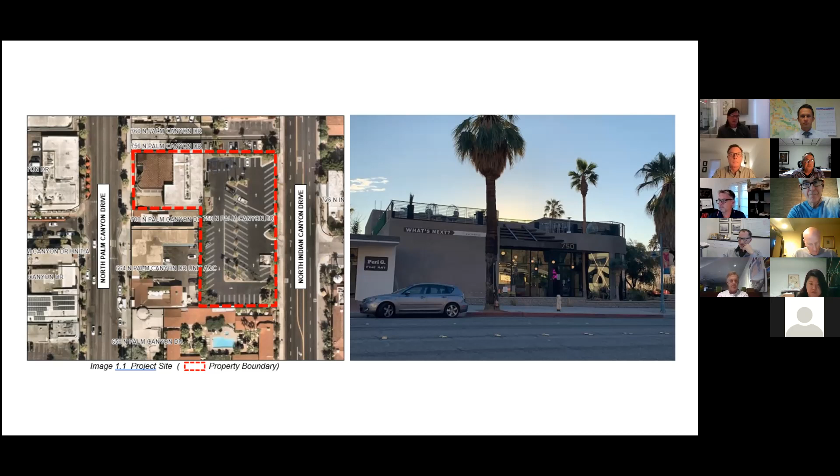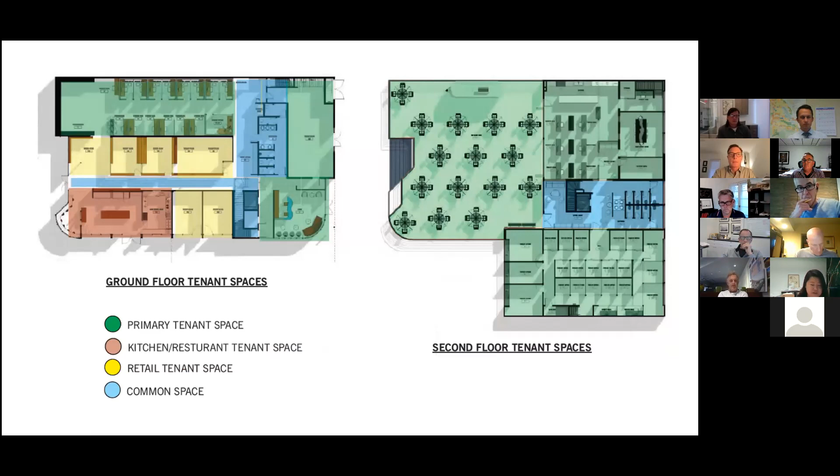Just to go over the project site one more time, the project site is a multi-tenant commercial building in the C1 zone, and it's a 2-story building, as you can see in this image. The building is going to be utilized by multiple uses that include co-working space, office spaces, cafe/restaurant and retail tenant spaces, and common spaces. This is the view of the building from the primary elevation, which is on North Palm Canyon.

As you may recall, previously the applicant proposed the installation of 13 signs. Since then, after receiving comments from the AAC, the applicant has revised the plan. One of the comments received was that the project is proposing too much signage, so the applicant has decided to reduce the amount of signage for the building.

So these are the signs that have been removed from the previous sign program. Before there were 13 signs, but now there are only 8 signs total proposed for this property.

The applicant has also revised the design of the freestanding signs. The proposed sign does not include the tenant names anymore. The height has been slightly reduced, as has the area. The construction of the sign itself has not really changed.

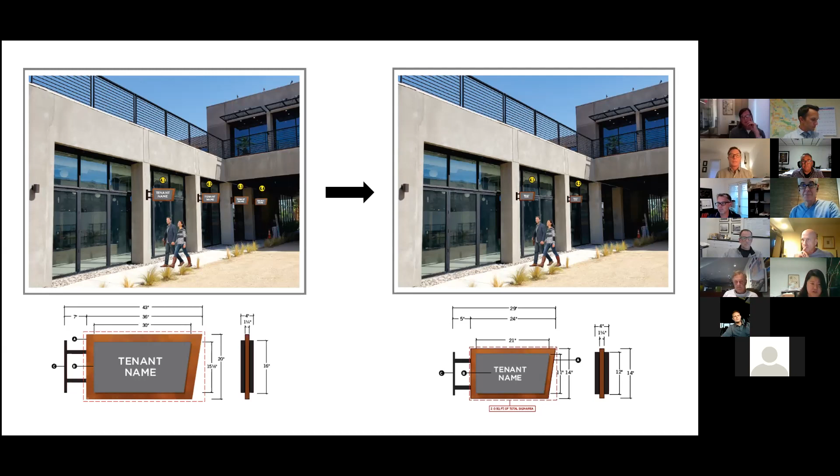The applicant is also proposing changes to the blade signs. As you can see here, the amount has been reduced by 50%. So instead of 4 signs, the applicant is now proposing 2 signs, and the size of the signs has also been reduced significantly. Previously, the projection was proposed at 43 inches; however, that's been changed to 29. This graphic shows how much of a reduction in size the applicant is proposing.

These signs were previously proposed on the North Palm Canyon side, the North Palm Canyon Drive frontage.

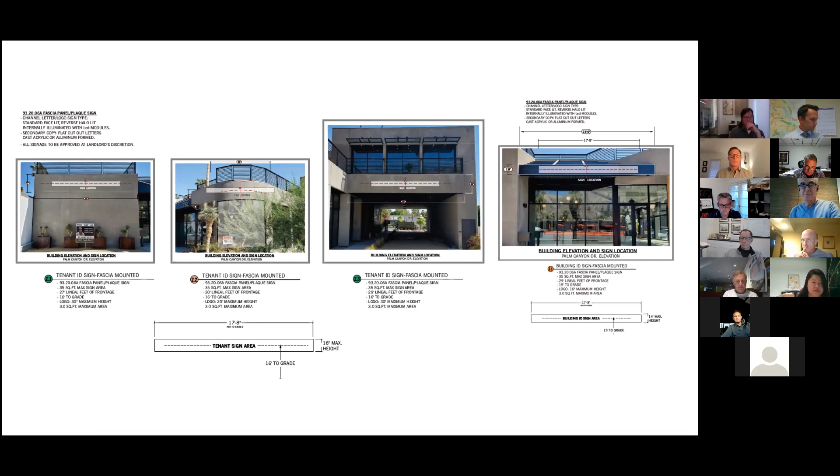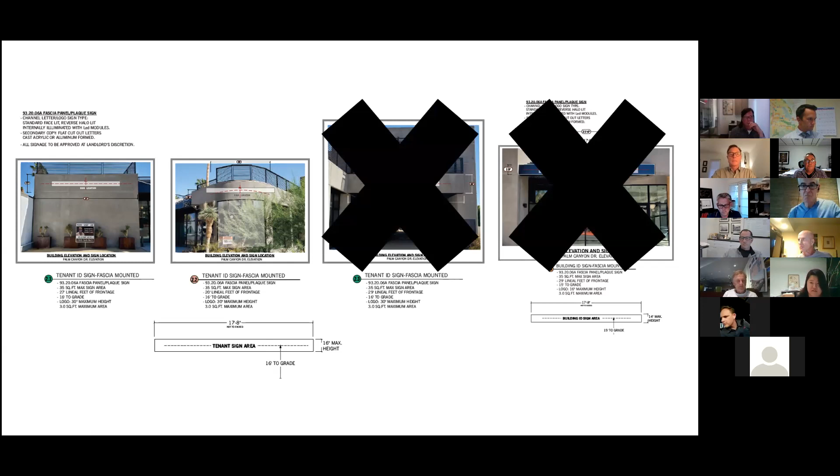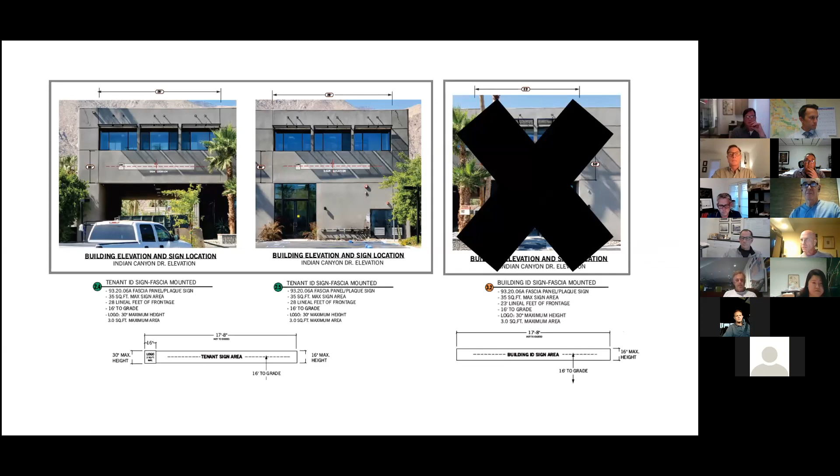Since the last meeting, the applicant has decided to remove the sign that was proposed above the driveway, as well as the fascia of the canopy structure. And for the rear elevation, the applicant has decided to remove the building ID signage. So these signs have been reduced or omitted from the revised sign program.

So the quantity of signage has been reduced, and the proposed signs now conform to the applicable zoning regulations. Freestanding signs will be fully located on the private property. Based on these findings, staff recommends AAC recommend approval to the Development Services Director as proposed. This is the end of staff presentation, and the applicant is available if you have any questions.

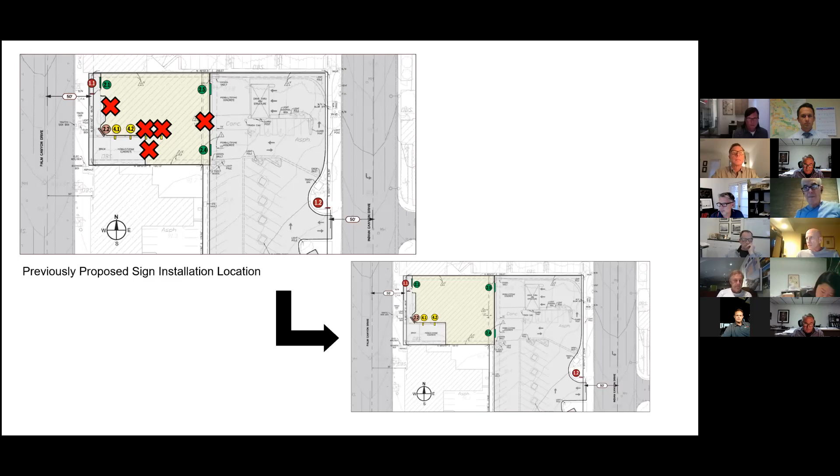John, I would like to confirm on the freestanding sign, which I think looks so much better than the previous one, that it's going to be made of aluminum painted to match Corten steel. I want to make sure it's painted to match, and not real Corten, so we don't have to deal with the rusting as it drips. Absolutely, yeah, it'll be a faux finish paint, and then it will be cleared, and there will be no issue with maintenance or actual rust.

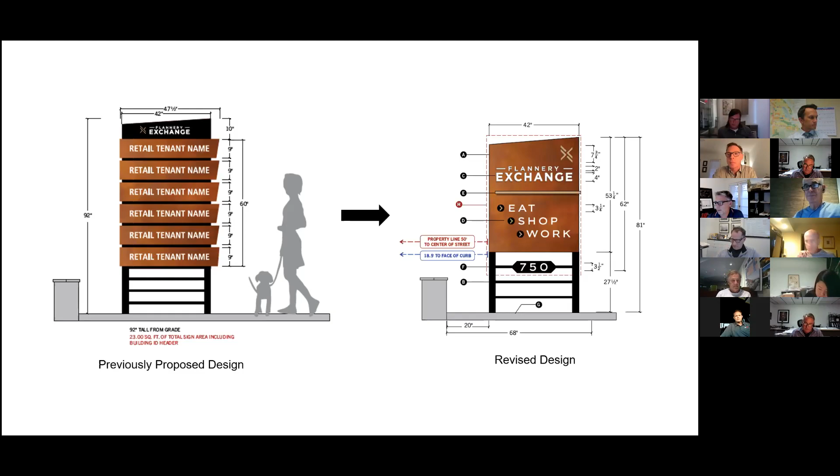Thank you. Do we have a second? Second by John Walsh. All in favor? Aye. Any opposed? Great, thank you. Thank you, Mr. Cross.

Okay, now we're going to move to a different sort of item for us, a discussion of the changes to the architectural review process. I'm going to turn the meeting over to Planning Director Flinn Fagg, who has been very involved with this and would be best to lead us through this discussion. At the end of this, we are not making a motion, but we're going to gather whatever comments the AAC has that Flinn can take back to whomever he needs to work with.

Mr. Chair, thank you very much, and thank you, members of the Architectural Advisory Committee. Appreciate you all moving your meeting to accommodate us tonight, and looking forward to hearing your thoughts and comments on proposed changes to the architectural review process.

What I'd like to do is a little bit different than what we typically do with the Architectural Advisory Committee. Let's see, can you all see my screen? Not yet. Okay, David, I might need your help. Just a moment.

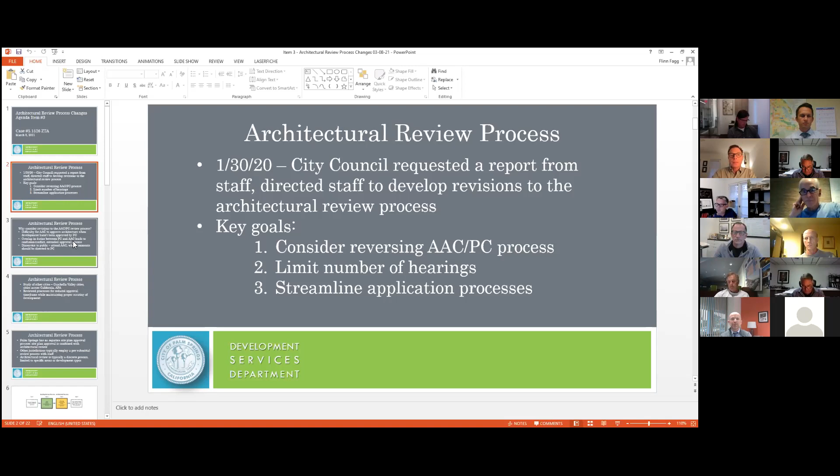With that in mind, the Planning Commission appointed a subcommittee to study the issue in July of 2020. On the subcommittee we had Kathy Wehrmuck, chair of the Planning Commission, Maria Song, a former member of AAC now on the Planning Commission, and Chair Jakeway representing the AAC. The subcommittee began a process of studying how we might do architectural review more effectively.

In terms of why we would want to do that, there are a couple of issues to address.

As you've all seen in past applications, especially where there are waivers requested or a conditional use permit dealing with operations, it's been difficult for the AAC to approve the architecture when there are still aspects of the site plan that haven't been approved by the Planning Commission yet. So you all are working with unclear boundaries in terms of what your responsibilities are.

Another issue is that there's an overlap between the duties of the Architectural Advisory Committee and the Planning Commission, so sometimes there are differences of opinion in terms of our criteria. That has been an issue sometimes in the past.

Third, and I think you've seen this in some applications, because AAC is first, it does a disservice to the public in that they come to the first meeting where they've learned of a project and want to give you all of their concerns and questions, and AAC really isn't the place for some of that.

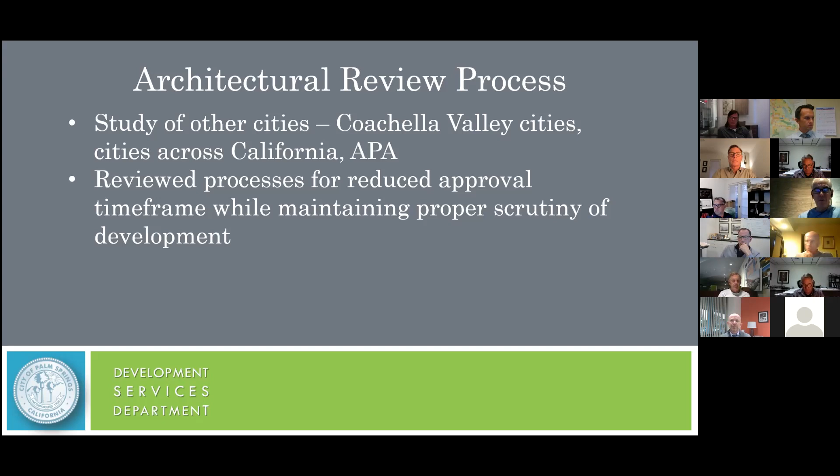Some of the things that we learned in doing that study is that Palm Springs has no separate site plan approval process, that we have a combined process, which is kind of unique that you don't see in other cities. Most other cities keep the site plan review process separate from the architectural review process. So we looked at that.

Also, many other cities employ some type of pre-submittal conference process with staff, whereby a staff member will sit down with an applicant before they have submitted formal applications, and review their project for conformance to criteria, both development standards such as height, setbacks, parking spaces, things like that, but also looking at any architectural criteria that that city might have.

Another thing that we learned from the study was that architectural review is typically a discrete process, and it's usually limited to specific areas of a city. Palm Springs, again, is kind of unique in that it applies to all commercial districts in our city, and also extends to residential districts in certain cases as well. So there's a number of ways that we're unique.

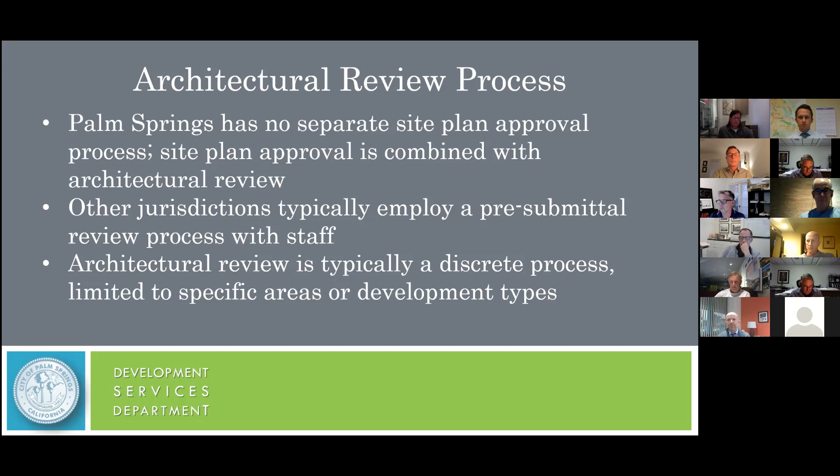We looked for best practices from other cities to look at what they were doing before getting into really looking at how we might make modifications to our existing code. So looking at our regulations as they currently exist for our architectural review process, it essentially goes as follows.

Step one is the formal submittal of the application. Staff takes in the application. We then route it to other departments for review, and prepare a staff report.

Step two is you, the Architectural Advisory Committee. So you all review the application, you make your comments, and you vote on the application.

Step three is Planning Commission. So they take into consideration the recommendation of the AAC, and then they either approve it, or in certain cases where city council approval is required, for example, for general plan amendments, change of zone applications, et cetera, then it is forwarded on to the city council.

So it looks pretty simple as you look at it in terms of a diagram. However, in practice, it actually is a little bit more complicated than that.

What typically happens is after the formal submittal, we take it to AAC, and for whatever reason, the applicant may need to redesign their project. And so it comes back to AAC again until you all are comfortable that it meets our criteria.

And then you'll forward it to the Planning Commission. Planning Commission will take a look at it, and sometimes they'll redesign it again, and it will go through that process. And so it's understandable that sometimes applicants are frustrated that once they've submitted their formal application, there are still a number of redesigns to the project.

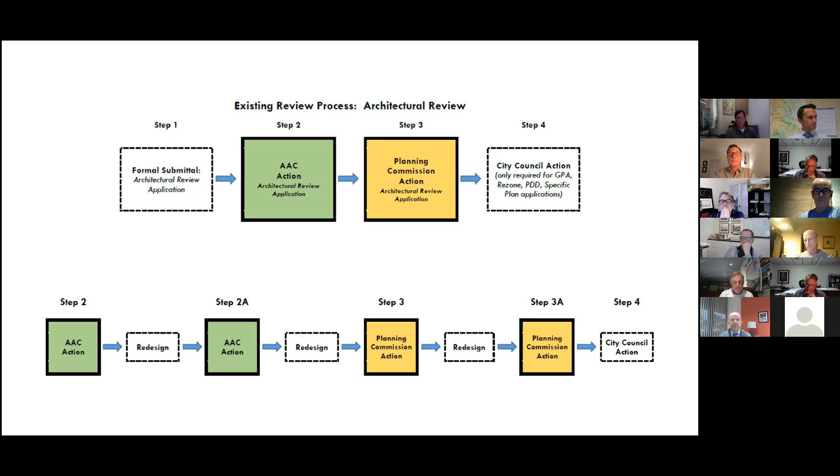So what we're proposing is that step one, prior to the formal submittal, would be a required pre-submittal conference with staff. The intent of that is to review the schematic design of the project for conformance to our architectural criteria, and look at conformance to development standards, again, parking requirements, setbacks, height limits, open space.

And then also to go over the required submittal materials. Part of the difficulty in you all making decisions on projects is because you don't have all of the drawings and the information that you need to make a decision. And so that's another reason for having a pre-submittal conference, is to sit down with applicants and go through what are all the required submittal materials that the AAC and Planning Commission would need to make a decision.

One of the other changes we are proposing is to split the process in two, with a separate architectural review application and a separate site development permit application. The architectural review application would go to the Architectural Advisory Committee, and the site development permit application would go to the Planning Commission. What we are attempting to do is give you all discrete responsibilities so there isn't overlap or conflict between the two groups.

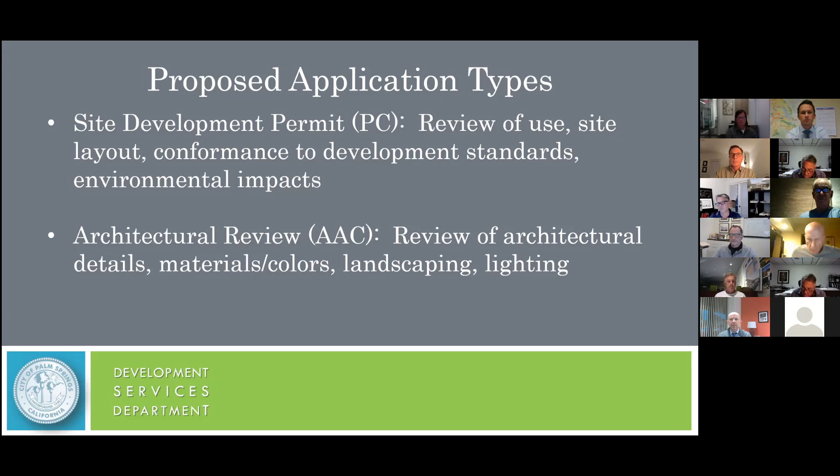Going into the proposed application types, the Planning Commission would review the site development permit. They would look at the use, the layout of the site, conformance to development standards. They would do the CEQA review or environmental impact review, and then approve the site development permit. Then the Architectural Advisory Committee would look at the architectural details, the colors and materials, the landscaping materials, placement of landscaping materials, lighting, hardscape—all of the functions of architecture.

To help you understand the difference between what Planning Commission is looking at and what AAC is looking at, I'm going to go through the approval criteria for both of those two permits that we're talking about. Let me start with Planning Commission first. These are the things that the Planning Commission will be looking at.

Number one, they'll look at conformance to the general plan—does it conform to the general plan density, floor area ratio, use? Secondly, they'll be looking at the use relative to the zone district where the site is located and impacts to adjacent sites. They'll look at conformance to development standards, which I use as shorthand for setbacks, height, lot coverage, parking, etc. They'll also be looking at whether the proposed height and massing of the project is compatible with adjacent sites, and the building placement relative to adjacent sites—looking at the context and making sure what is proposed is consistent with it.

Another thing they're looking at is issues relative to traffic, in terms of the number of trips generated or vehicle miles traveled, which is the new standard under the state. They'll also look at the alignment of driveways or streets within the project with the existing grid—again, looking at issues relative to the layout of the site plan.

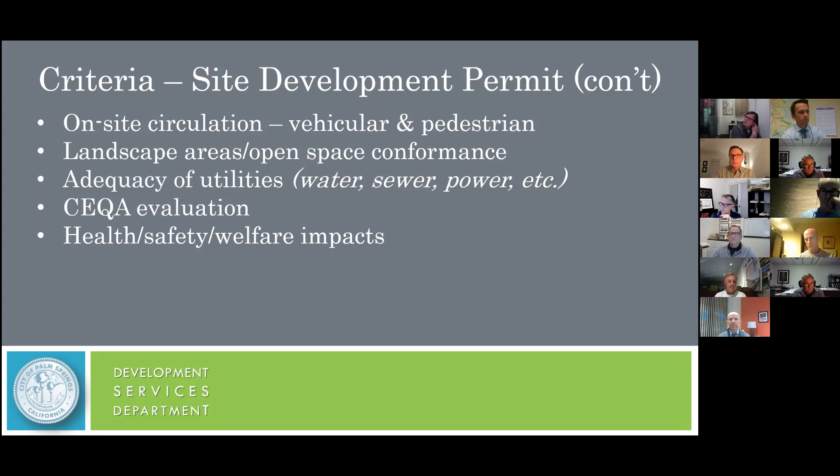Moving on to the architectural review process. The criteria I'm going through now are the things that you all as the AAC would be looking at. So, architectural treatment being consistent on all four sides of the building—consistency of treatment is one of the things you would look at. You would also look at the design of accessory structures in terms of the materials and colors—are those consistent with the principal structure? So looking at carports and things like that on the site.

You'd look at the composition of facade elements and the fenestration in terms of the aesthetics of the facade treatment.

You would also look at the appropriateness of the materials relative to its context, looking at the adjacent buildings. And in hillside areas, this is most important, looking at whether the materials are appropriate for a desert environment on a hillside in terms of what is proposed there.

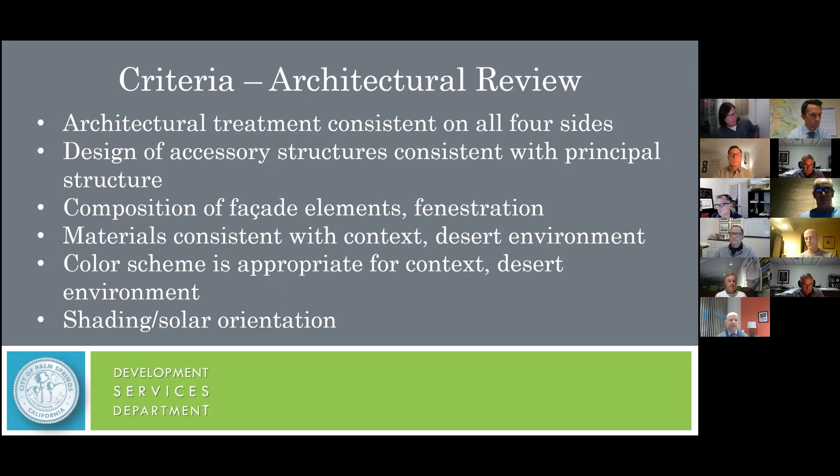You would also look at the color scheme, whether it's appropriate for its context, for hillside areas or the desert context. Another thing you would look at is shading and solar orientation, looking at window openings, whether there's adequate shading of those openings relative to the seasons and the sun.

The landscape plan is another important component you would review, consistency with our water efficient landscape ordinance and any other landscape requirements we've adopted. We would also look at adequacy of shading of sidewalks, parking lots, and pedestrian facilities, if they have any seating areas outside on the site.

You would look at your lighting plan conformance to code. John McCoy, we can't afford to lose you because you're our expert in that regard.

We would also look at sign locations and placement, where those might be located either on the building or on the site, and the appropriateness of those locations. Screening of mechanical equipment and service areas. And then finally, consistency with any adopted design standards.

Currently, Miralon has design standards, the Escena development has design standards, and any other design standards we may adopt at any point in the future. So those are the things that you would be reviewing.

Again, what we're trying to do is eliminate the overlap between what Planning Commission reviews and what Architectural Advisory Committee reviews, so that you have discrete responsibilities. We feel this will help shorten the process by reducing overlap while still maintaining the adequacy of the reviews we do at our board and commission levels.

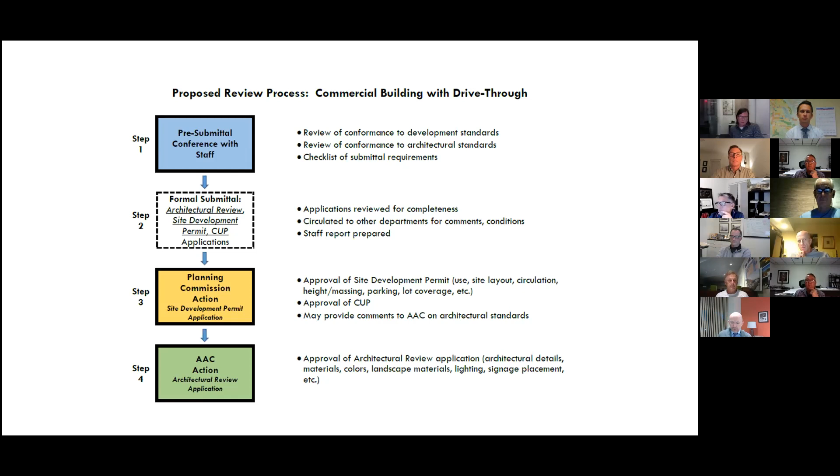Moving on to another type, one of the changes we're proposing is that for hillside reviews of single-family residences, currently the process requires review both by the AAC and the Planning Commission. What the subcommittee has recommended is that only the AAC would review hillside houses in the future, and Planning Commission would no longer be involved in those reviews.

You as the AAC would have the sole responsibility for review and approval of houses in hillside areas and also on major thoroughfares. So for a hillside house, the process would go as follows: Step 1 is the pre-submittal conference with staff.

Just like a commercial project, we'd review it for conformance to development standards, conformance to architectural standards, and then provide a checklist of submittal requirements. Next, they would formally submit their application. In this case, it would just be an architectural review application, so one application instead of two, and then it would go to AAC and you all would review and approve the project at that point. So this helps to shorten the process by removing Planning Commission from these types of reviews and leaving it solely to the responsibility of the AAC. That's how we would improve the process for those particular types of applications.

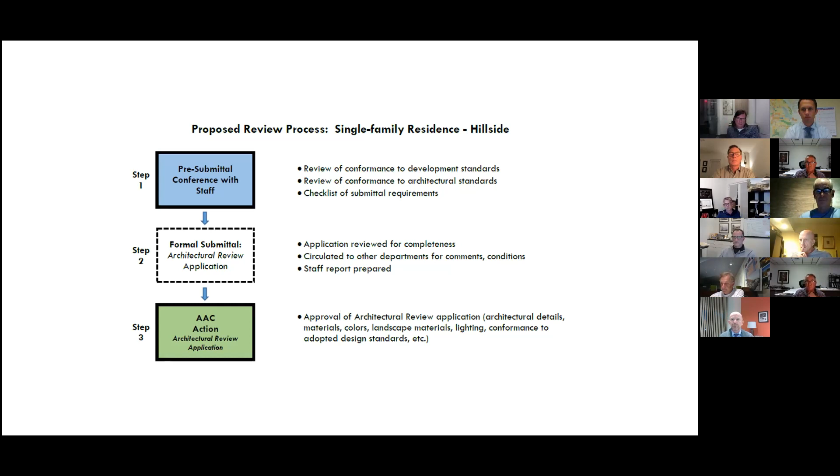Give me just a moment.

The subcommittee looked at other processes as well. We didn't just focus on the architectural review process. One of the other processes we discussed was the signage process, one that you've been through this evening. In terms of sign programs, what is being proposed is that AAC would also have final action on any sign programs where waivers are required. So instead of a two-step process that we have now with AAC and Planning Commission, we would cut it down to just a one-step process where AAC would have final action on sign programs.

Sign districts are basically sign programs for an area. One we'll be looking at here in the near future is for the downtown project. Miralon is another project that has a sign district, as it covers 300 acres and has multiple signs throughout the property. For sign districts, currently City Council has final action. We're proposing to move that down to the Planning Commission and let them have final action on sign district applications.

We looked at other things that don't really fall under the responsibility of the AAC. For example, conditional use permits. Currently there's a process that requires certain conditional use permits to be approved by City Council. We're also modifying that process, but again, that's not something that impacts the AAC.

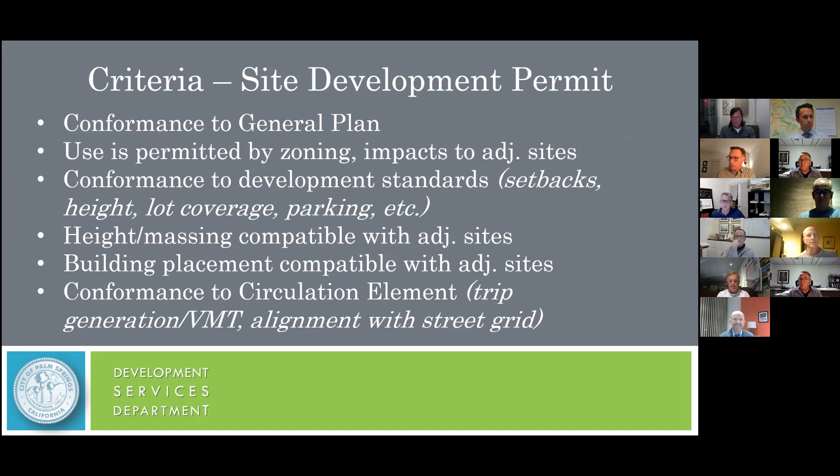I know it's a lot to absorb, so while you're all thinking, let me go through a few things I had, Flynn. Certainly. Let's use the Raising Cane's project as an example. Say it gets approved by the Planning Commission, and then it comes to us for architectural review. Currently, we're only allowed to review the project twice, and then it would go to the Planning Commission. What happens if after 2 meetings we don't approve it? Does it come back to us again?

If you don't approve a project after 2 meetings, the applicant would need to resubmit the application. So if you can't make the findings that it meets our architectural review criteria, or can't set conditions of approval to bring it into conformance, that tells us it really doesn't meet the criteria and the applicant needs to reconsider. If they have an approved site plan from the Planning Commission, it doesn't mean they go back to square one—it just means the architectural portion of that application, the materials, fenestration, composition of the facades, etc., is what they'd need to resubmit and go through again.

So if the architectural corrections involved changing the footprint of the building, but not its location, would that need Planning Commission approval, or is that close enough, or is that something the planning director would decide?

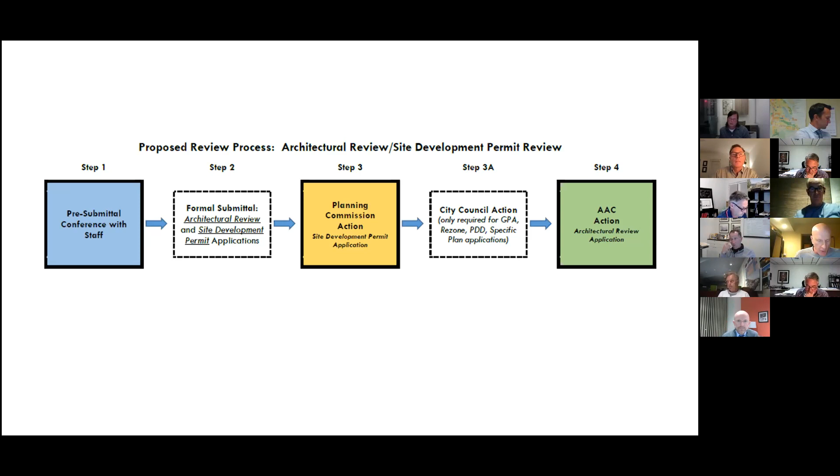On your matrix of proposed changes, I noticed under architectural review and major site plan review, new multifamily residential goes up to Planning Commission, and the AAC or ARC would not be involved. Thinking about Miralon and the subcommittees between AAC and Planning Commission that reviewed the architecture of individual houses and as a whole, that seemed like a pretty important component, and it seems like that's been eliminated.

Good catch, Mr. Rotman. That was not the intent. For certain applications under state law, under Senate Bill 35, it limits the architectural reviews cities can impose, but it doesn't limit all residential reviews. So my mistake there. For those not subject to state streamlining, they would still be subject to architectural review, and Miralon is a good example.

For example, when a new single family subdivision is proposed with repeated models throughout the development, that would still come before the AAC to review the architecture of those houses. Certain multifamily projects would still come before you for review and approval of the architecture as well. It's only those exempted under state law that wouldn't come before you. So let me make a change to that chart.